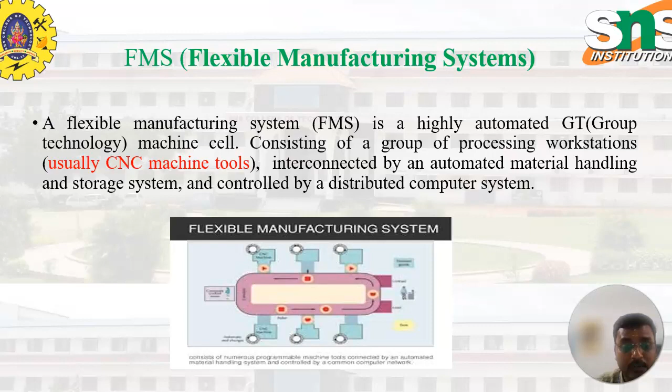Group technology is nothing but the grouping of similar parts or machining operations together to make the product. So here we have many types of advantages and many types of layouts. Some of the flexibilities in manufacturing are machine flexibility, production flexibility, mix flexibility and product flexibility.

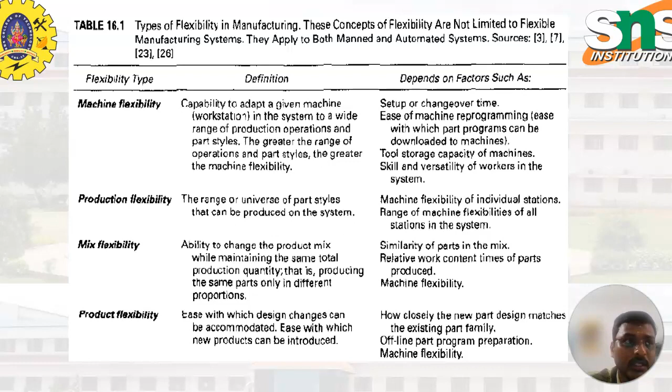Machine flexibility is the capability to adapt a given machine workstation in the system to a wide range of production operations. So we can connect n number of machines in a single layout, and we can give the component to be worked on in that particular machine. Production flexibility is the range or number of part styles that can be produced on the system. They can do one operation and directly move to the next operation, then mix flexibility. These are some of the advantages.

Then routing flexibility, the capacity to produce parts through alternative workstation sequences in response to equipment breakdowns and tool failures. In case any machine breaks down or a tool fails, we can directly move that particular work part to another machine to complete the process.

Volume flexibility is the ability to economically produce parts in high and low total quantities of production given the fixed investment in the system. Expansion flexibility is the ease with which the system can be expanded to increase the total production quantities.

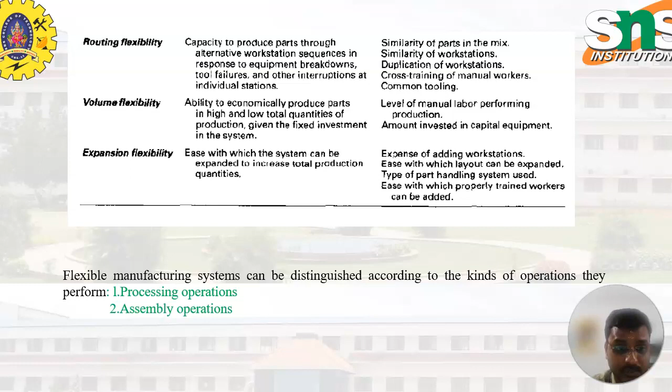FMS can be in two kinds of operations: processing operations and assembly operations. Processing operations transform the work material from one state to another, moving towards the final desired part or product. It adds value by changing the geometry, properties or appearance of the starting materials. Processing means the main operations that give the shapes or properties of materials.

Assembly operations come after the processing operations; after completing the product, we make an assembly. It involves joining of two or more components to create a new entity, which is called an assembly or subassembly. Permanent joining processes include welding, brazing, soldering, adhesive bonding, rivets, press fitting, and expansion fits.

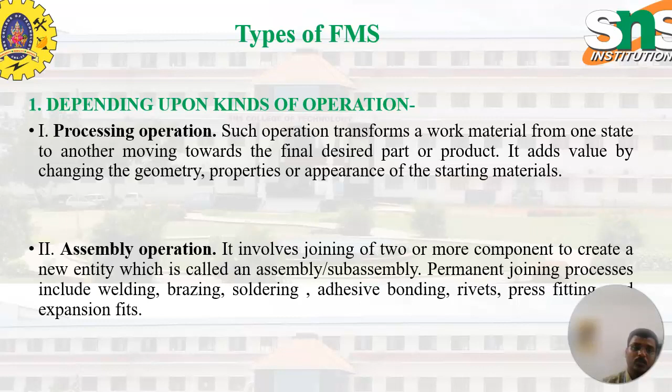These two are the main types in FMS. The processing operations and the assembly operations help to make the product easily and with quality. Regarding the types of FMS, depending upon the number of machines, we have three types: the single machine cell, SMC; the flexible manufacturing cell, FMC; and the last one is FMS.

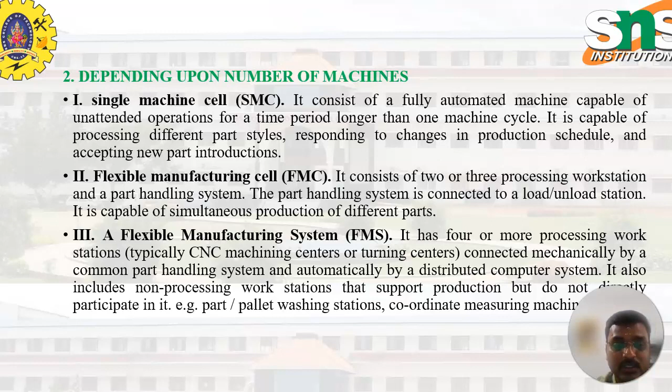A single machine cell consists of a fully automated machine capable of unattended operation for a time period longer than one machine cycle. It is capable of processing different part styles. The FMC consists of 2 or 3 processing workstations and a part handling system, so it will be like a layout where processing is done continually. FMS has 4 or more processing workstations, interconnected with CNC machining centers and turning centers to complete the process.

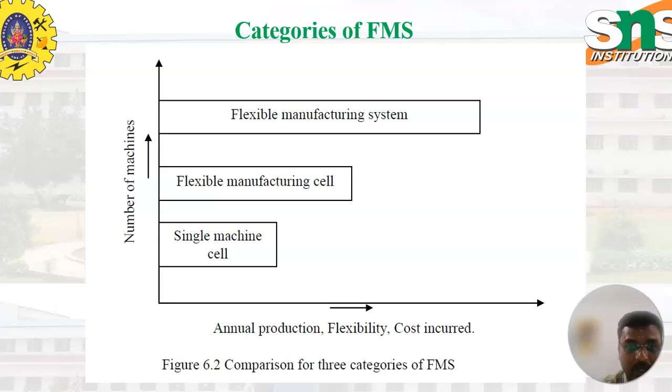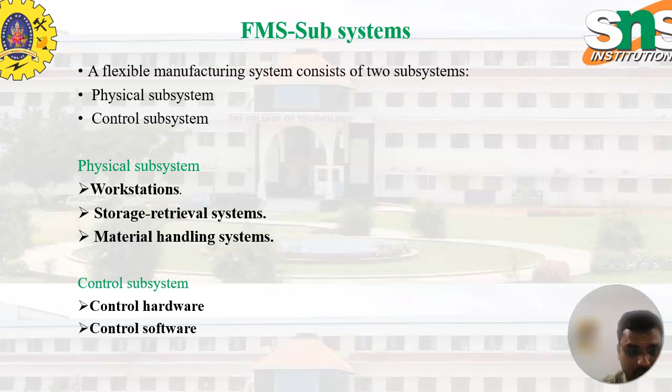These are the categories of FMS: single machine cell, flexible manufacturing cell, and FMS. Depending upon the level of flexibility, we have 2 types: dedicated FMS and random order FMS. The flexible manufacturing system has 2 subsystems: the physical subsystem and the control subsystem. The physical subsystem is the workstations, storage and retrieval system, and material handling system. The control subsystem is the control hardware and software. This is the flexible manufacturing system introduction.